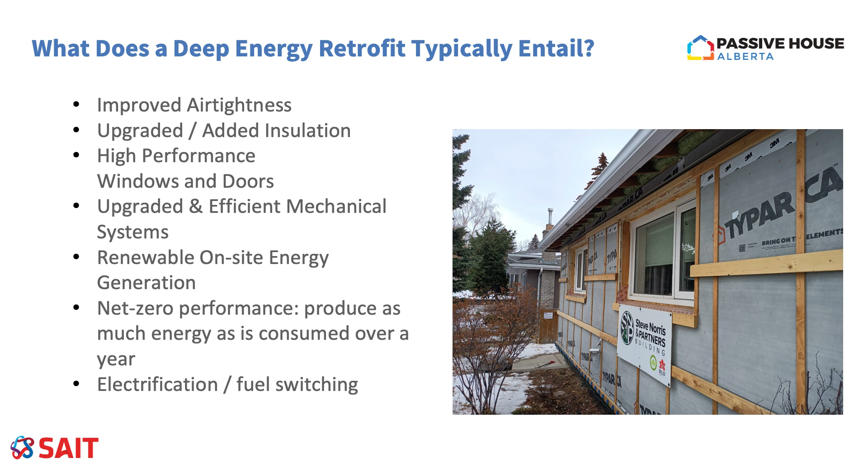Along with those initial improvements, we want to upgrade to more efficient mechanical systems, and that's where the whole conversation around heat pumps comes into the equation with retrofits as well. We get rid of a standard gas-fired furnace and switch to a heat pump with electrification, which we'll get into a bit more later on. This is kind of the order of operations you want to roughly prioritize. After we do all that, we reduce our energy use. Then we look at adding renewable on-site energy generation. And one of the targets we look at is net zero energy performance, so producing as much energy as we consume over a year on site.

One of the key strategies and conversations that we'll be having today, which Frank's going to lead, he's done a lot of research around it, is electrification or fuel switching, getting rid of any use of fossil fuels in our home and moving to all electric as a strategy to reduce emissions. So this is all the work we're doing. It's a lot, and it's not cheap at all. It takes a lot of planning and a large budget, and there's different mechanisms to look at accounting for that.

But why are we doing that? Is it just for the energy savings? Is it just for reducing emissions? There's a lot more benefits to it. So improve thermal comfort. How many, when it was minus 35, were just hanging out in shorts and a t-shirt in your home right next to your big living room window?

That's great. All right, so improve thermal comfort. That's one of the nicest things, and every time we go through a cold spell in the wintertime in my house, I'm like, gotta convince my wife that we can do this work, and the cost is worth it. Energy savings, reduced emissions, that's one of the largest overarching conversations we're having through this conference is reducing emissions, and how does energy contribute to that?

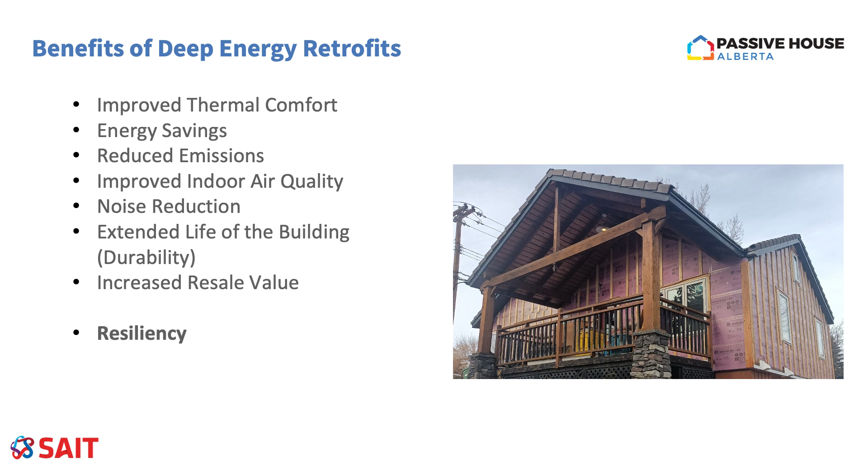I think a couple of the other key benefits here towards the end of the list: extended life of the building. When we do a deep energy retrofit and we do it properly, you have minimal maintenance required on that building for 40 or 50 years. That's the target. So it's a lot of money up front, and sometimes you phase it over a few years to make it more palatable for your pocketbook. But when you do it right, your home setup is going to work well for a while. Increased resale value, you get a great facelift update to your home.

And then finally, resiliency. And this is a big one that's a larger and larger conversation over the past couple years as well. So when we talk about resiliency, it's making these buildings so they can withstand the increasing severity of environmental conditions and weather events. So primarily, we look at the majority of climate events. I'm in Northeast Calgary, I got that ping pong ball sized hail back in 2020 at my house. Luckily, we're a stucco clad house, so we didn't get an instant reclad of our house without a choice.

But there's resilience against adverse events like that: hailstorms, heavy storms, heavy winds, winter blizzards. Some areas you have flooding. When we look at building resiliency into a deep energy retrofit, you look at what climate events you might be subject to and design to accommodate those. One of the key things we look at in Alberta, especially with events a few weeks ago, is resilience to cold weather. That super insulation and airtightness can help maintain comfort through cold spells. And doing that through upgrading the envelope, that's passive performance. It's something you do once and it just works, whether or not there is power.

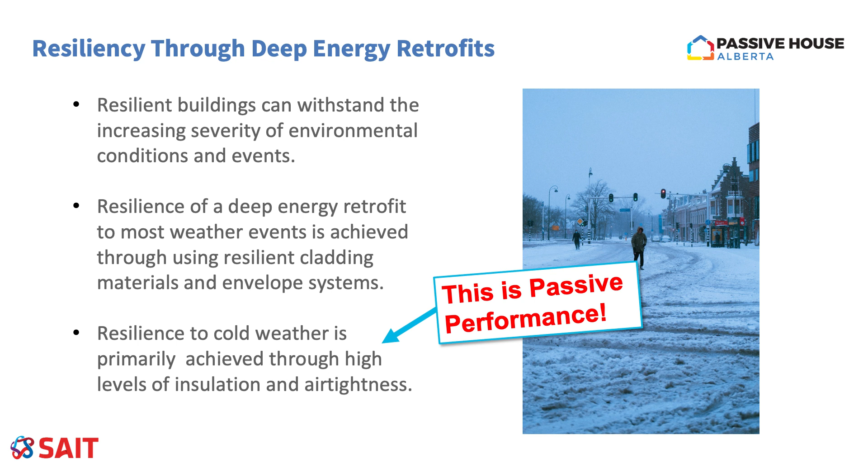There is a passive house that was constructed in Calgary just a couple years ago. Project Leo, if you Google it, there's a few videos explaining a bit more about the home. That home has 2 suites with 4 adults in it. When the emergency alert came out saying reduce your energy use, they turned off their heat overnight for 10 hours with temperatures between minus 35 and minus 33. Their temperature inside only dropped 2 degrees.

So that's resilience. So it's not so much a concern of the renewables not being able to, we'll try not to get too political here, produce when we need it, when there's peaks on the grid in the wintertime at night, when the sun's not shining and the wind's not blowing. But it's having that resilience that even if the power does go out, your family's still safe and warm in your home.

So one of the key things I like bringing it back to every time we talk about retrofits or even new construction and improving efficiency is this quote from Amory Lovins: "The greenest unit of energy is the unit of energy that is never generated thanks to efficiency and conservation." So if we don't need it in the first place, the conversation of where it's coming from is less important.

So there's a lot of work going on right now around Alberta and Canada and accelerating deep energy retrofits. There's a lot of funding programs coming from Natural Resources Canada. But here's a path, things we can look at doing. So start with an energy audit and apply for the Greener Homes Grant. There was an announcement earlier this week.

So here's an illustration that we have created. I believe it's in the retrofit guidebook as well. It's relating, here's what we want to do to renovate our home already. We want to replace siding, windows, heating system, different things like that. How does it relate to things we might do in a deep energy retrofit? And here's the benefits that we can get out of these steps beyond just the aesthetic upgrades.

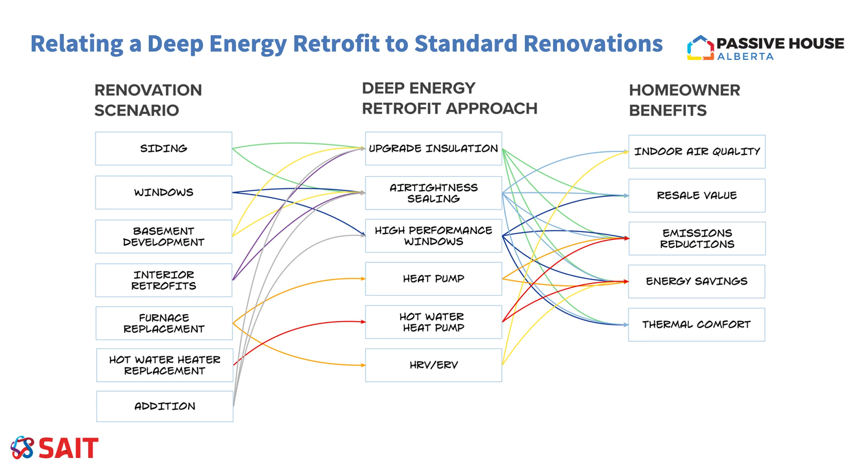So there's a lot of things we can get out of these homes beyond just upgrading and making it look better and saving energy. And I think that's one of the things we need to keep in mind. So one of the things that Frank has been working a lot on, and I'm going to kind of introduce and set the stage, is building electrification. So in Alberta, this is a huge topic of conversation of moving away from reliance on natural gas or fossil fuels to power our homes and going onto all electricity to run our homes.

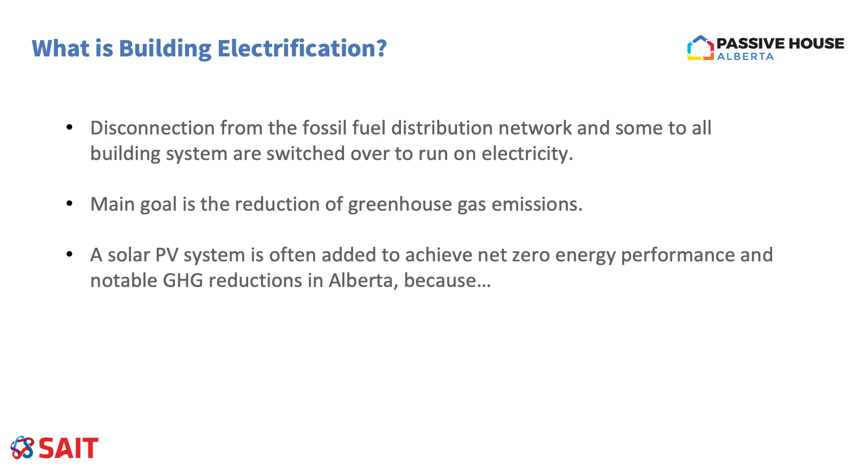So when we electrify a building, we're disconnecting that natural gas line and changing it so everything in our home runs off of electricity. So the main purpose behind that in Alberta is greenhouse gas emissions. It depends on specific homes, but largely in Alberta, unless you do significant envelope improvements at the same time, if you just switch your natural gas furnace to a heat pump, it's not going to be a financial savings operationally in many cases.

When we do electrification, we also will pair solar PV, or photovoltaic solar panels, on your roof as part of the project. And that's where we really achieve greenhouse gas emissions reductions. Because in Alberta, our grid is not all hydro-powered like some other provinces. We still have a lot of natural gas. So I like making this comparison here, we'll do on this slide quickly.

So there's a strategy in adopting these things. And our grid is getting greener over time. We used to be like the second worst province or territory in Canada, I think just 5 or 6 years ago, when it came to how dirty our grid was, how many grams of CO2 were emitted per kilowatt hour of electricity produced. But we are getting better. There's a good downward trend on that.

But as we retrofit, we can reduce the energy use. We reduce the amount of electricity we're using, regardless of what source it's coming from. We install solar. That makes it instantly green. That's where you achieve true emission savings when you do a retrofit, through utilizing solar at the end as the cherry on top. But the obstacle to that is it's one of the higher price point items in doing a deep energy retrofit.

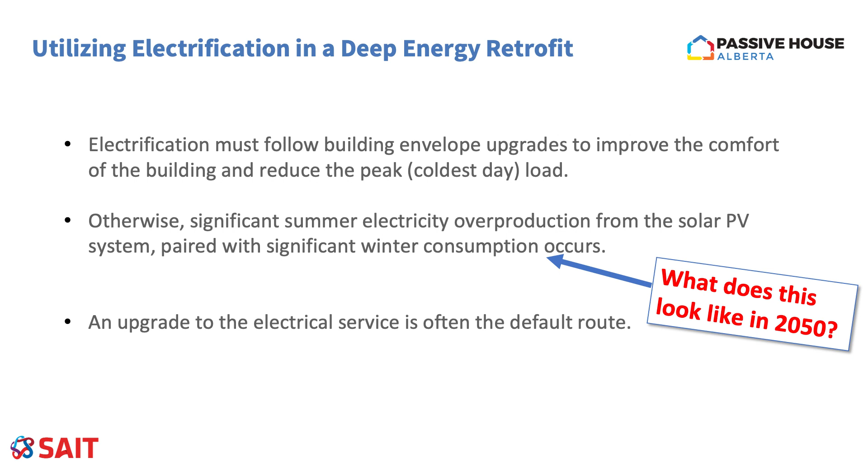So, and that order is really important: electrification, switching from a natural gas furnace to a heat pump to heat your home and removing all those other uses of natural gas in your home, follows the envelope upgrades and other energy efficiency measures. And then we can have a nice, comfortable building, and we have a significantly lower peak load because of those steps we've taken early on.

In a lot of homes, it might not be feasible to install the amount of insulation they have in Project Leo, where you're losing 2 degrees over 10 hours at minus 35. But still, you can be more comfortable for longer with less heat. And most importantly, the steps we take to improve the envelope and reduce the energy use of our homes during a retrofit will reduce our peak load on the grid when we do have those deep cold times, those peak loads in the depths of winter.

So if we don't focus on improving the envelope, we'll still have significant peak loads in the wintertime. And net zero solar, net zero is a real buzzword. Like, we can just add enough solar so our home produces as much energy as it consumes over the course of a year.

But in the summertime, we're relying on other homes, other uses of that excess electricity in the summertime, we put that extra onto the grid. But in 2050, if every home's net zero, every building's net zero, and everyone's producing excess electricity in the summertime, where's it going to go? So when we focus on reducing our energy needs in our homes and buildings, we can reduce the significant summer excess supply, and we're also reducing our wintertime peaks where we still rely on the grid energy from other sources.

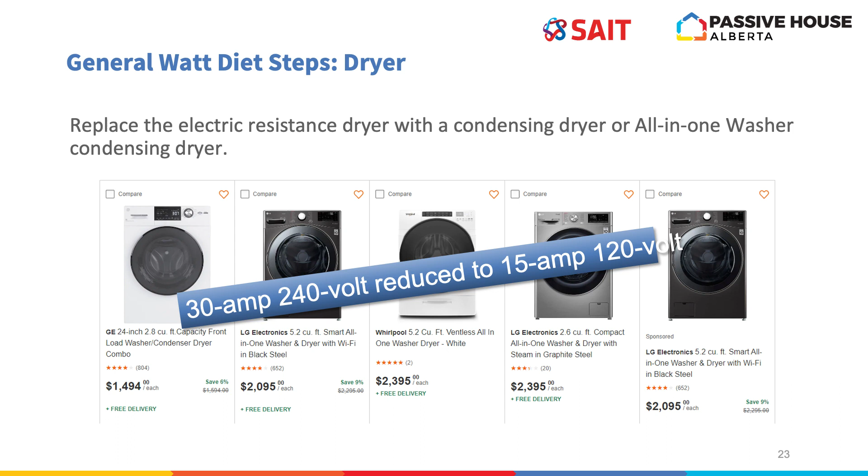If you guys are going to replace your laundry appliances, don't just get another dryer, don't just get another washer, get a combined all-in-one washer and condensing dryer. The nice thing is, this is one of the few times where everything combines. Since it's an all-in-one unit, it's been around in Europe for a long time, but now it's in North America, you put your dirty laundry in, 2 to 3 hours later, you get clean, dry laundry out. So that's kind of nice.

And since it's condensing technology, it doesn't need to have a vent to the outside, so it's 2 to 3 times more efficient at doing the laundry. And from an electrification point of view, you don't need that really big electrical circuit, the 30 amp 240 volt plug. You just use a very small 15 amp 120 volt plug.

Talking next about the envelope. So Ben kind of talked about what a deep energy retrofit will look like on a more theoretical level. These are kind of some very vague targets that you're going to try to aim for. So get our air changes per hour, that's how much air is leaking in and out of the building, less than 1.

If you have a 2x4 wall, add about 6 inches of insulation, about R24. If you have a 2x6 wall, then add 4 inches of insulation. Put in good high-performance triple pane windows. Insulate below grade if you can. At least 1 foot down to the footing is better. And if we have an attic, stick a whole bunch of insulation up to add about R80 of insulation into our attic. So that's kind of roughly what the deep energy retrofit is going to look like.

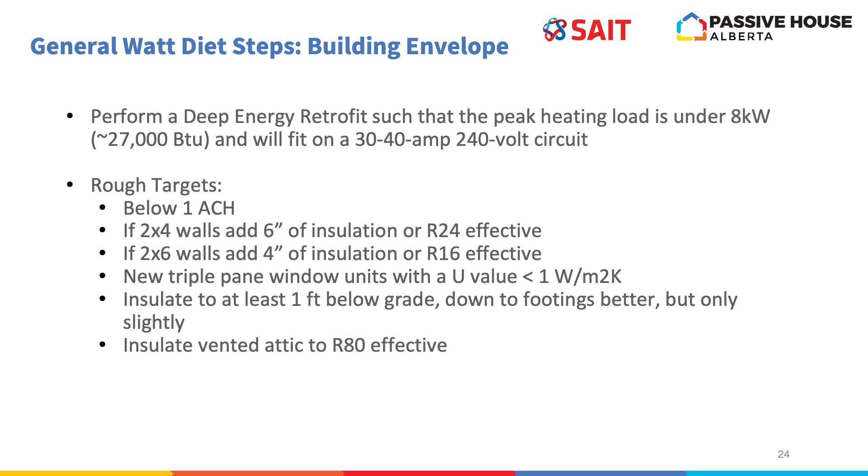And by doing that, we get our heat load down to about 8 kilowatts, which is probably going to fit on that electrical plug that we just freed up from our all-in-one washer dryer. So then we can start to electrify our heating system. We don't want to do that first very often because our load's too large. Once we've dropped the load, then we can electrify the heating and cooling system.

It replaces our furnace, uses the same ductwork, and we use some type of heat pump, either an air source heat pump, which uses the exterior air, and in our climate, below minus 25, we'll still need some supplementary resistance electric heat as backup or fossil fuel backup. Or you can use a ground source heat pump, which uses the ground as the heat sink, and then it doesn't need that backup system because the ground never gets colder.

We want to add an ERV, which is an energy recovery ventilator that will provide us that fresh ventilation into the building and also recover some of the moisture and the heat out of the outgoing air. And we want to reuse as much of the ductwork that we already have in the building. It's there, we might as well reuse it.

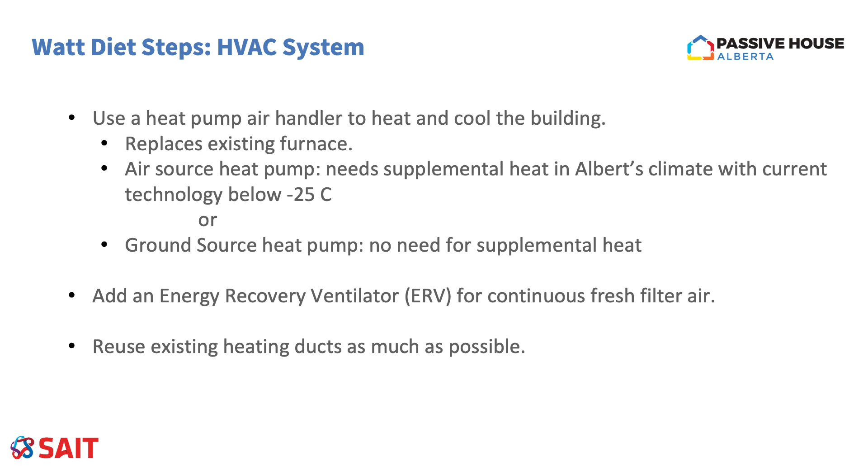But we still have a few other things we want to add. We probably want to add an EV charger, we probably want to add that big solar panel system, and we're going to have to add that supplementary electric resistance heater on our air source heat pump. So how do we do that? We use devices that are called load share devices. This is an appliance you stick onto your electrical panel board that allows you to add additional appliances to it, but doesn't actually change the calculation of your peak load. So it doesn't affect the peak draw from the grid.

There's two main types. One's called a primary and secondary load share device, and one's called a circuit pauser. The primary secondary is good if we have two different appliances that have a similar large load, but work at different times of the day, because one has power when the other one doesn't. And the circuit pauser is what we should be using to add that large EV charger, because the circuit pauser monitors the mains, and if we're not drawing too much electricity overall, then it will give us power for that EV. So we can put a really big EV charger on without affecting our overall draw from the grid.

And these things are pretty cost effective, $850 to $1,300 for the equipment, 1 or 2 hours for an electrician to install it. You do need to use an electrician and you do need to take a permit out.

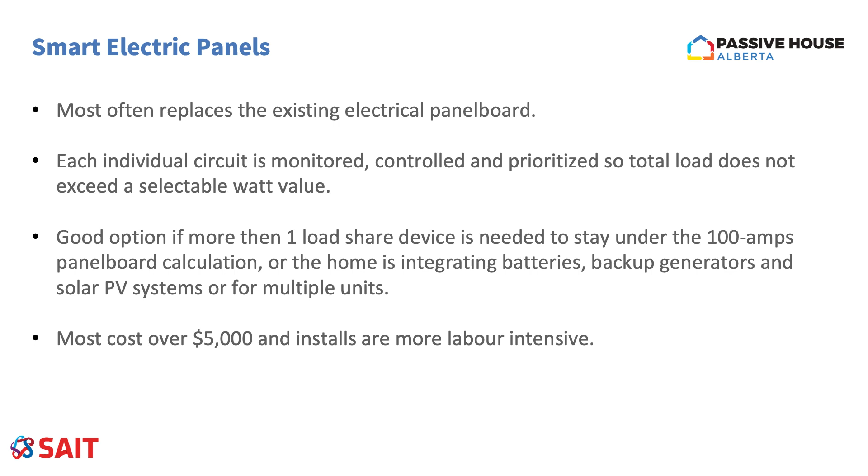The other thing you can do is go one more step up. If you're wanting to add other things, you can use what's called a smart electrical panel. So if you still can't quite make it under 100 amps, then you can use the smart electrical panel. Also, if you're wanting to have batteries or some type of backup generator, or maybe you have a duplex or a fourplex, a smart electrical panel might be a good option. They're good options because they allow connection of all these different pieces of electrical equipment. They do cost more. They're about $5,000 and more labor to install.

But we still need to add that large solar PV system. So for these, we want to use what's called a splitter. The splitter basically takes your electricity coming from the meter and splits it to two different connections. One goes to your panel, one goes to the large solar PV system. So again, it's not impacting the electricity that flows through the electrical panel from the solar panel system.

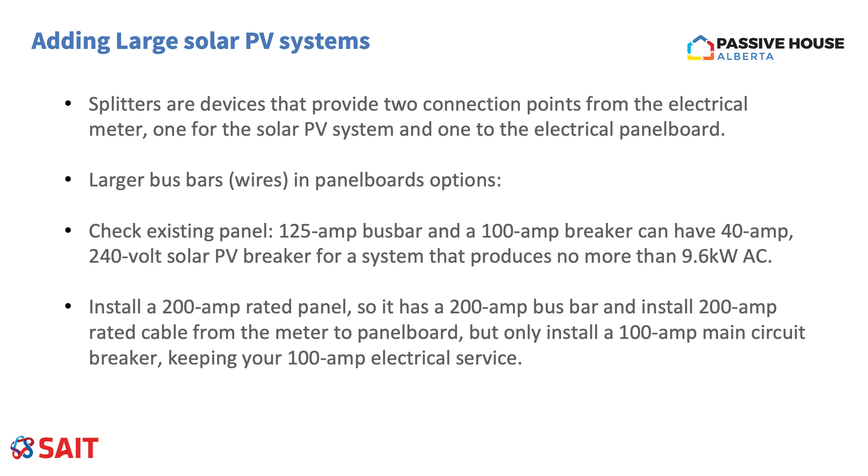Because what your solar PV system can do is add more electricity, which will overload the bus bar. This is probably getting a bit too technical, so you can either read the report or read the slide or talk to me afterwards. But there are ways to avoid the electrical panel upgrade with a large solar PV system.

All right, so now let's actually show you some people who have done this, to see that it can be done and it is possible. So here's a single family home built prior to 1970, pretty typical house, split level house. The roof was getting old, needed to be replaced. The siding was getting old, needed to be replaced. The windows were the single pane sliders, they couldn't open them in the winter. So a lot of things needed to be done anyways.

So this was a great time to, instead of just doing like for like replacements, do a full deep energy retrofit. So they dropped their energy use from 134 gigajoules down to 43 gigajoules, so about 80 gigajoules of energy savings on an energy model per year. They increased the architectural appearance of the home. They now have a nice 40-year warranty on their roof, easy to add solar panels to that roof. They have much more comfort because they've totally disconnected from the natural gas grid. They were able to recover some of the space in the chimney.

They used to work at home in the very small cramped office, but now they've recovered the space from the chimney. They've moved their furnace into a crawl space, so they've made the space much more livable. They have a nice larger office. So it's not always just about energy, it's combining it with other comfort improvements and doing it when you have to do something anyways. And not doing the like for like, doing the deep energy retrofit in planned stages. Here they did it all in one stage.

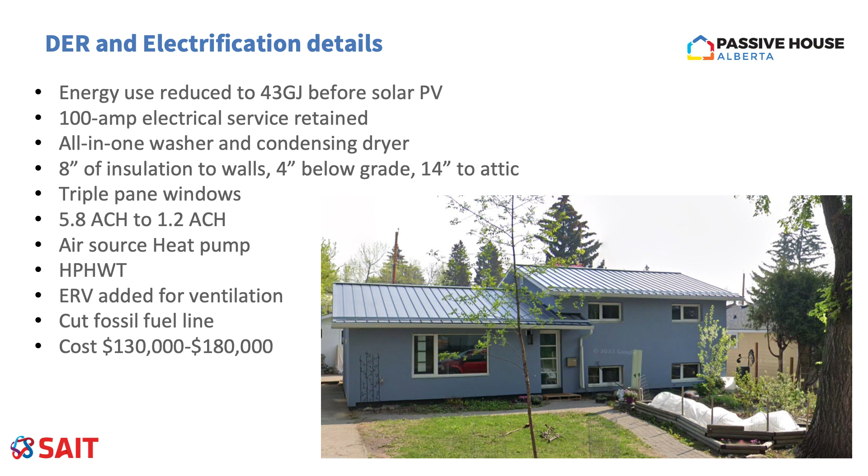All right, and I really like this project. So this is from EcoSynergy. It's a home up in Airdrie. And they really wanted to see what can we do with a newer home to electrify, or, I believe they're branding this in some places as the no demo retrofit. So this is a 2010 home and started off with a 125 amp panel, 100 amp circuit breaker, standard building envelope for the time, 2x6 construction, a bit leaky, fossil fuel furnace, electric range, vented attic. Basically like homes are still being built today, with the exception that a lot more homes are using heat recovery ventilators.

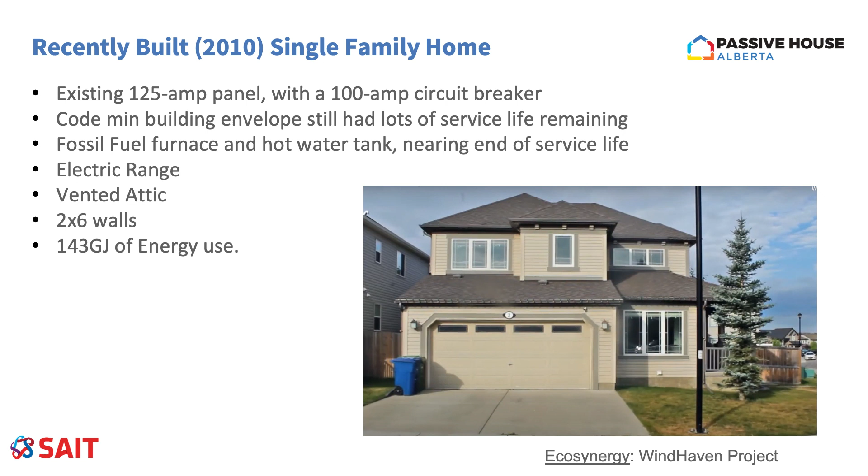So this home started off with 143 gigajoules of energy use, which is a significant amount. We can do a lot better than that, and that might be similar to some homes constructed in 1970. So energy efficiency across homes has not really improved much for decades. We are better than the early 1900s when we were insulating with newspaper or air and prayers. But this home is a really cool use case: what can we do to electrify without over-insulating the home?

So what they did for this home is they used air sealing with AeroBarrier technology, where they're able to just mist through the unoccupied home before they moved in, and it goes in and searches out and seals all the cracks. They're able to improve the air tightness down to 1.2 air changes per hour, and I believe it was 3 or 4 air changes per hour to start in that home. And one of the biggest things they did was utilizing a ground source heat pump. So in this case, they didn't really reduce the energy it takes to heat or cool the home. They just changed where that energy was coming from.

Rather than natural gas in the furnace in the basement, let's get the energy out of 350, 400 foot boreholes. So as you can see, there's an aerial shot of when they were putting in the boreholes in this home, and they're able to get that ground source heat pump system installed. It was pretty invasive. It's not feasible for every single home, but in the end, they're able to reduce their energy use from that initial amount of 143 down to 62 gigajoules on that home.

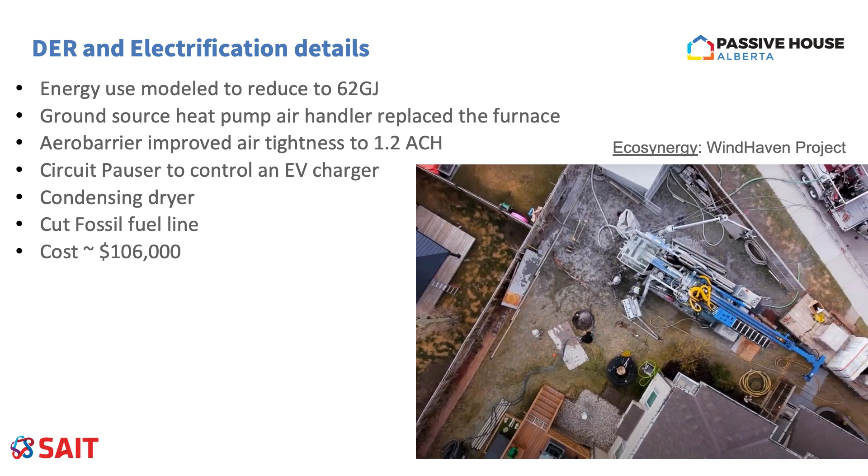So they were able to bring their energy use down a moderate amount without too many steps, but then they really just changed that heat source to the ground source heat pump, which worked out very well. Total cost for all this work was $106,000. So not too bad, but it's a great case for them. 10 kilowatt PV array installed.

A couple notes on what they ran through: their loads went to 104, so ideally they could just switch their breaker up to 125 amp, but the local authority would not accept their load splitter, so they still had to upgrade to a 200 amp panel. So it's part of the authorities being aware of these key steps and being on board with processes and what really works.

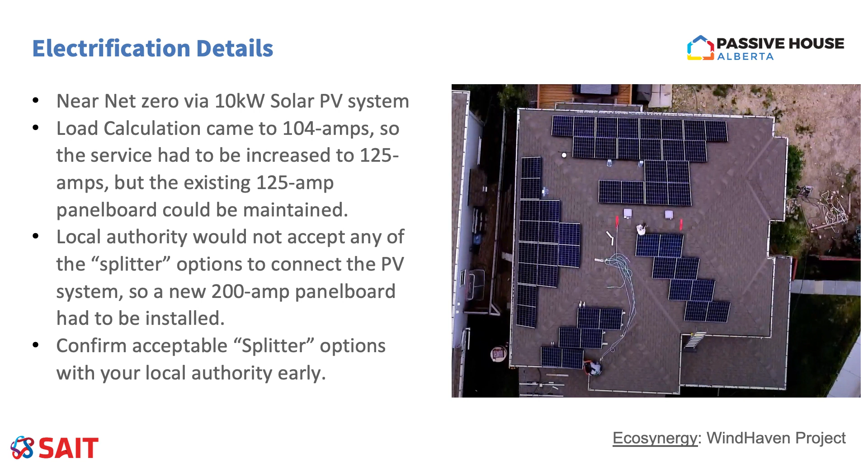So, lessons learned from the electrification work and deep energy retrofits as a whole, from some of the projects we've been tracking over the past few years. When it comes to electrification, you need to get your electrician on board. They're the ones that can do the load calculations and verify what can be done, what you can fit on your existing panel, and you also need to verify with your local authorities, your local municipality, to see what's required.

And all the myths about how you can't electrify or it's going to be way too much, they're false. We can do it. Heat pumps work, even in cold snaps. They just need to be properly designed and installed. Electrification without a service upgrade is proven, and it is achievable. It's something we can do with minimal costs, and there's a lot of other benefits as well.

But the biggest takeaway from all of this is to really start with a strong plan for deep energy retrofit. If you're thinking of improving your home, the best place to start is getting an EnerGuide evaluation of your home done that really shows you where your home's starting from. And then work with an experienced energy advisor.

Hopefully they are the person that did that plan, and they can work with you to figure out what the best version of your home is in a net zero state. And then that can paint a roadmap for you of what you need to do to move forward with deep energy retrofits and electrification.